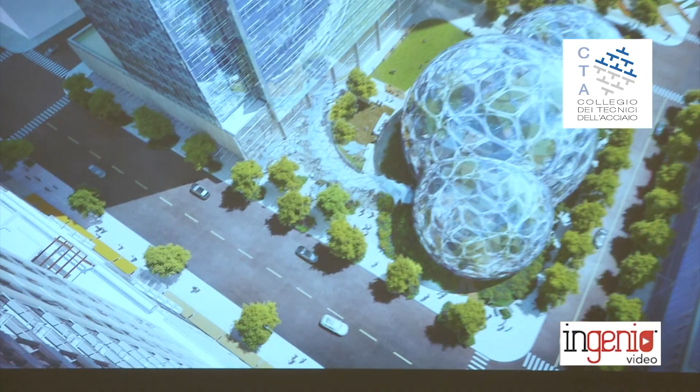So the first project I'll share is the Spheres, which is for Amazon at their headquarters in Seattle. This project came as the challenge of the chairman of Amazon, Jeff Bezos. He approached the design team and said, I want to create a place where my employees can go and have a nice break, experience nature, and experience a lot of oxygen intake, because if you're around plants, your brain works better due to the oxygen. He wanted us to create this place, and challenged us, saying, if you think about the historical conservatory, in the sense of a traditional British conservatory where plants are grown inside, I want to reimagine that with some kind of new place and new structure.

Don't repeat what has been done before. So, of course, we looked and studied all these historical references as inspiration for what we might do different and better.

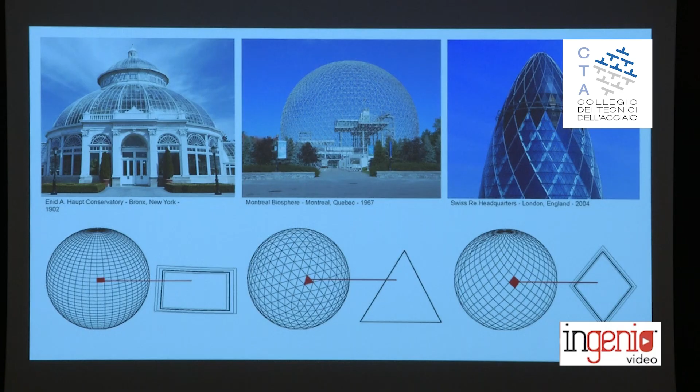The idea came to us trying to apply very simple principles of geometry. How do we create these spherical structures in something that can be easily rationalized through mathematics? The ultimate answer for us was a geometric form called a pentagonal hexecontahedron. It's a very big word, but essentially it's a soccer ball with 60 sides, all sides being equal, and each panel being a pentagon. If you make that pentagon 60 equal, identical times, you can make the spherical surface.

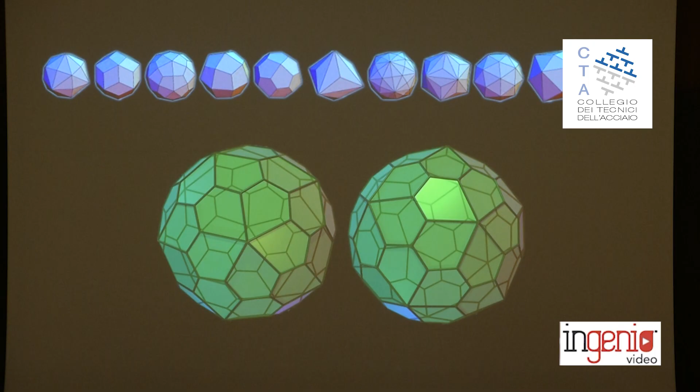This was the basic idea, and the punchline to this entire project is if you have a guiding principle, a big idea that you can formulate your design around, you can create very complicated, seemingly complicated structures, but actually made very simply.

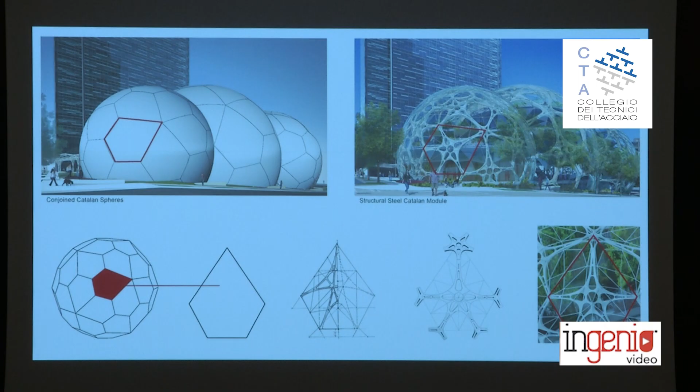So in the case of applying this pentagonal shape to this sphere, you can see here the beginnings of the idea of how we might create this pentagon 60 times to create the sphere. But the pentagon, in terms of its scale, was quite large, and in order to stabilize it, we needed to create some kind of bracing structure inside it to keep it stable. We studied many variants of what that bracing structure might be inside the pentagon to keep its stability.

Ultimately, we resolved to this combination of engineering, art, architecture, and fabrication. This was the output of a great collaboration between the architects, engineers, and fabricators, looking for a solution that was quite beautiful in the architect's eyes, could be rationalized by the engineers, and then the fabricators could bend and weld to create this piece easily. This was the key to the entire project. If you make this piece over and over again, you have the structure.

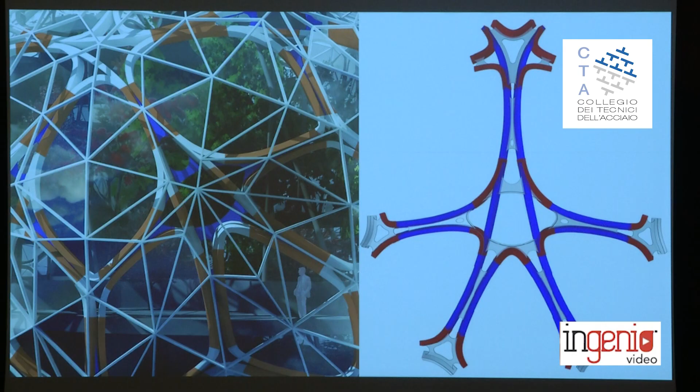At the end of the day, when we made this building, the entire set of structural drawings were only 12. Only 12 drawings to make this building. That's how simple it was.

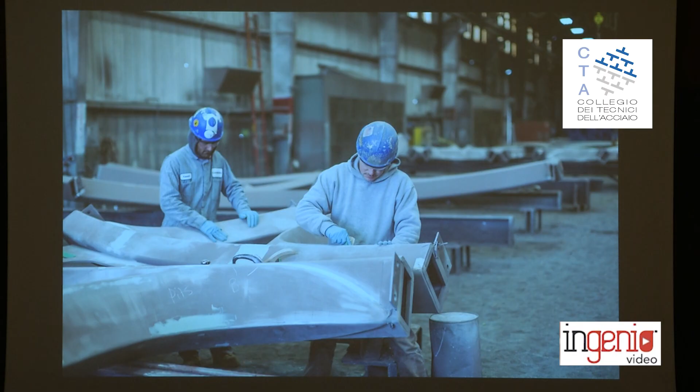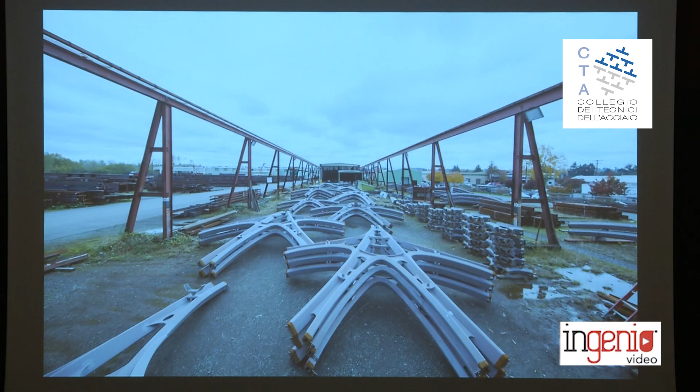So the fabrication ensued. All of the pieces were made very carefully in the shop, pre-assembled and stockpiled. You can see here that they're stockpiled in identical pieces so that it can easily be shipped to the site and assembled. As they arrived to the site, they were lifted in place. You get a little sense of the scale.

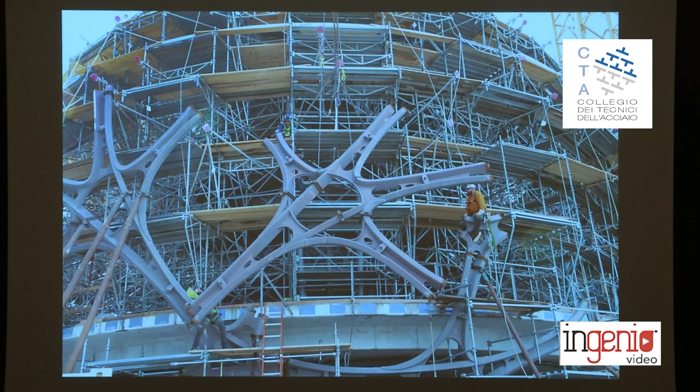They're quite large. And as they were put together, the assembly in the field, the actual connections and attachments went together very smoothly because of all of the tight tolerances that were available to us via the shop construction and the prefabrication. The ironworkers had virtually no troubles with fit-up or any erection issues during construction.

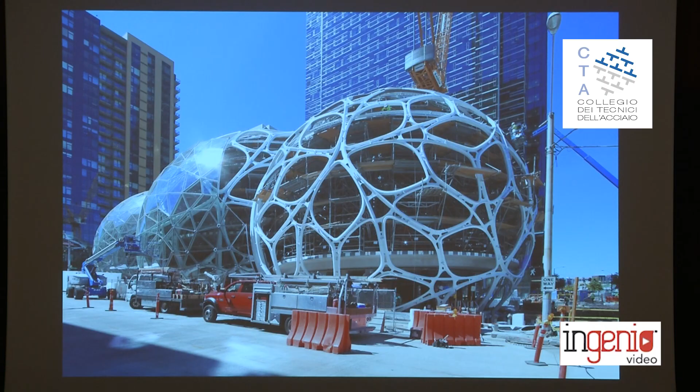And then when the project was completed, it turns out to be quite beautiful. In fact, I mentioned there's 12 drawings for the entire structure, these 3 spheres that are conjoined. There's 1 drawing for each sphere and 9 drawings for where the spheres conjoin. That's where the complexity was.

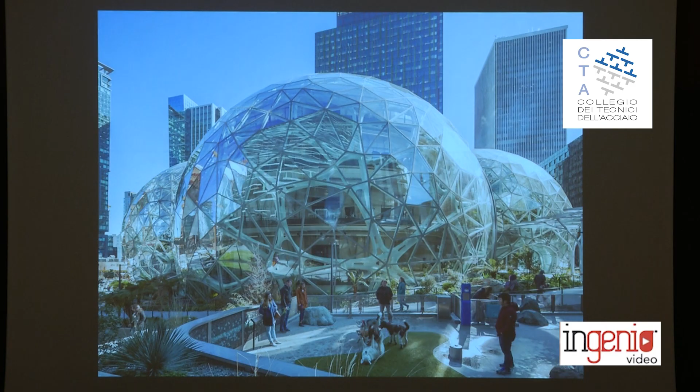But the principle to this whole story is that you can make these very beautiful structures very simply if you use steel and if you have a big idea that can drive your design thinking.

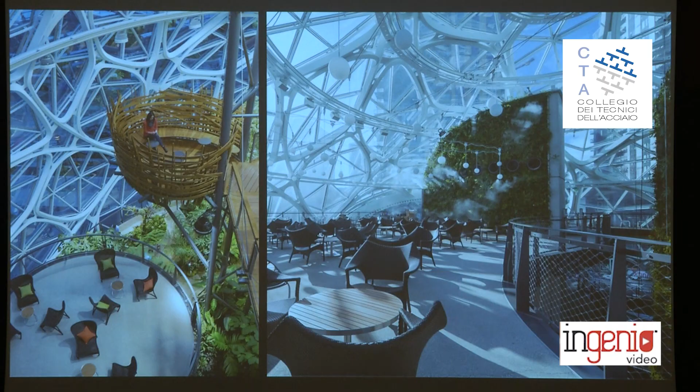These were completed about 2 or 3 years ago, so if you are able to visit Seattle at some point, please come by to visit. I'll give you a personal tour.

It's quite fantastic. Inside, there are 40,000 plants, and these plants were all selected very carefully so that the humidity and temperature control are such that it's a very comfortable place for people to be. As opposed to many conservatories, you go in, it's very humid, very warm, very uncomfortable.

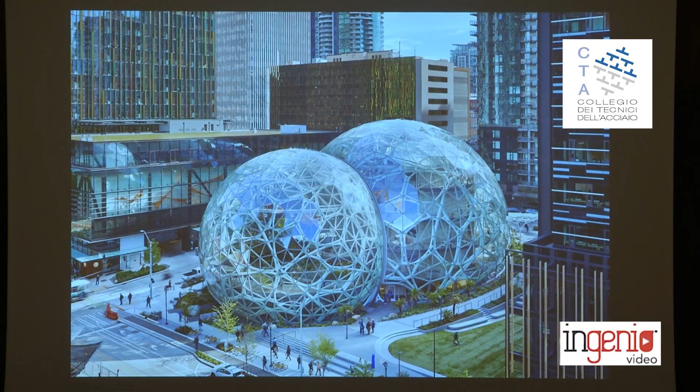In this particular case, because the charge from Jeff Bezos was to have a place for his employees to go, it was very carefully selected by a botanist to select plants that could survive well in an environment that had a low humidity and a comfortable ambient temperature for people.

All right, that's the first project. The second project I want to share with you is a tall building, and the conclusion of this story is through a unique steel construction, we were able to reduce the construction period by a third.

Not 1 month, a third. The construction period for this building was originally thought to be 32 months. We actually completed the building in 22 months. And it was all driven by the structural system I'm going to share with you.

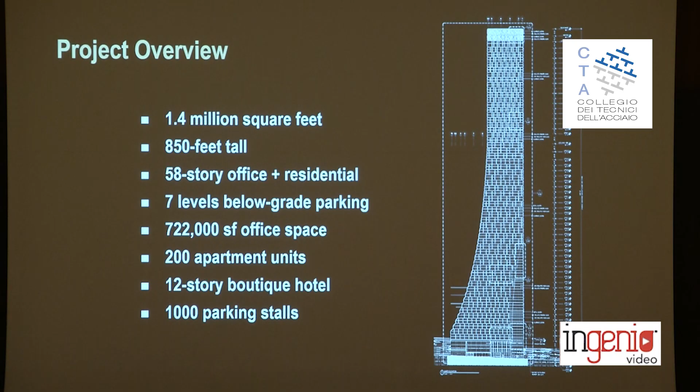So here's the building. It's about 260 meters tall, so fairly tall, mixed use, and a very slender building. The floor plans for the building are fairly typical of what you might see anywhere in the world.

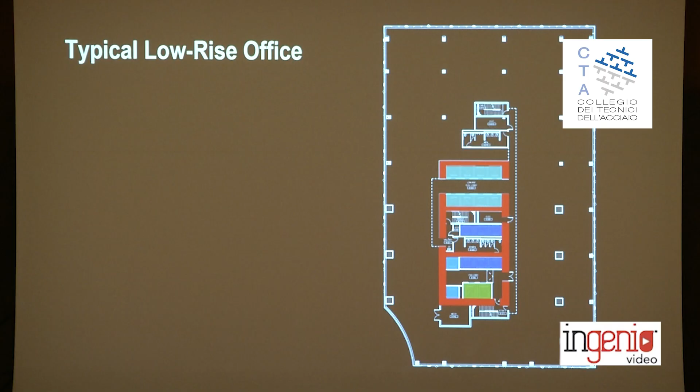Here in the red color is the core, which ultimately is the structural bracing and structural core of the building. But this is a typical low-rise floor. As the building goes up, it tapers, and the core also reduces in size.

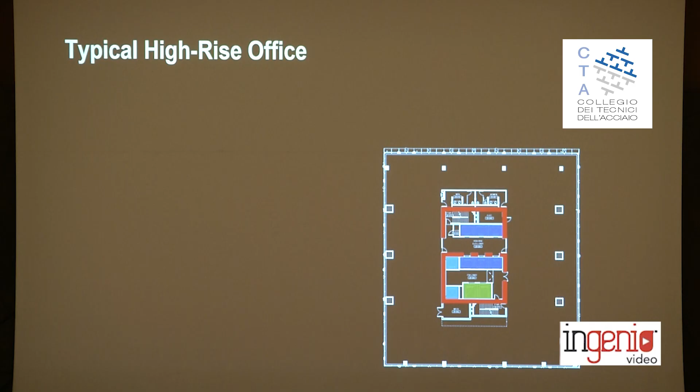And at the top of the building are residential apartments, and the floor plate has gotten much smaller, and the core once again is much smaller.

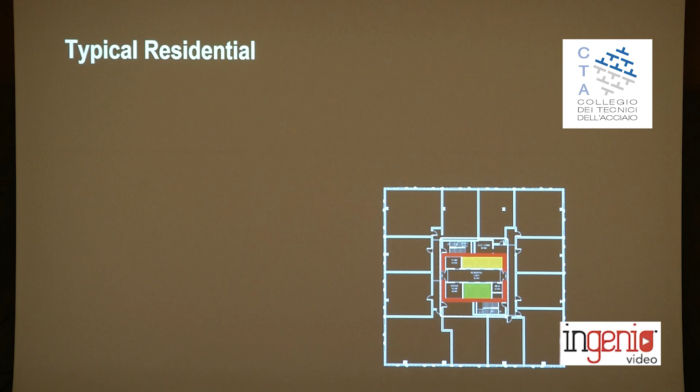It turns out in this building, because of its height and slenderness, that the core alone was not enough to brace the building for the high winds and high seismic load. And so we also included the idea of outrigger and belt trusses. Nothing unusual about this structural system.

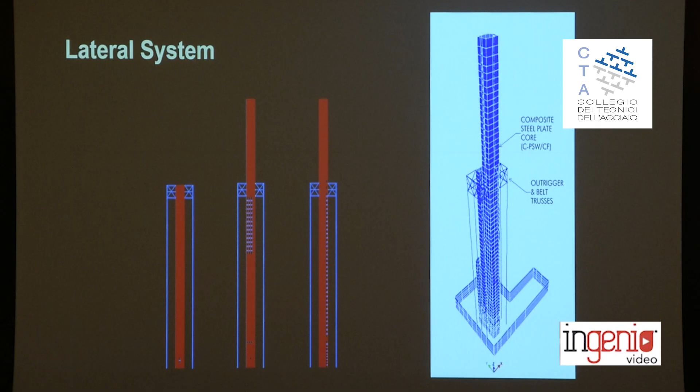This is a system that's been used regularly on buildings around the world. Nothing unusual about it.

Also, in the beginning of the project, the idea was to build the building using a technique that's very common, which is a reinforced concrete core surrounded by structural steel floor framing. This is really a tried and true construction approach.

On most projects that I'm involved in, it's common that the core might advance 1 floor per week, whereas the steel floor framing might advance 2 or even 3 floors per week, much faster. So there's this lag between the concrete construction and the steel, so as they go up the building, the steel ultimately catches the concrete.

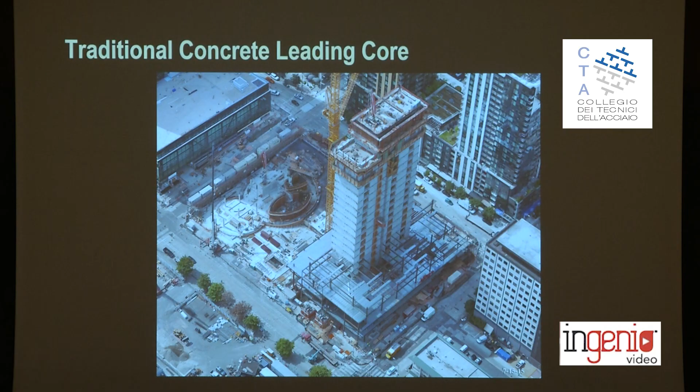Our challenge, or our thinking, was how do we solve that problem, or how do we go faster and not have that time lag? And the solution that we came up with was something that we ultimately call SpeedCore.

Maybe you've heard of this, but what it is, is a prefabricated modular panel system wherein steel panels are prefabricated in the shop, trucked to the site, erected like Lego blocks, and then concrete is infilled later.

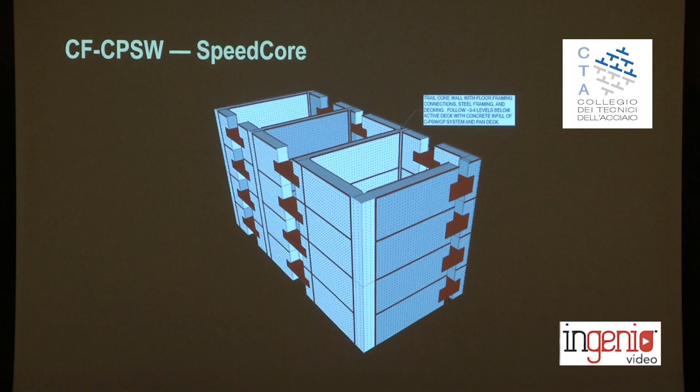There's no reinforcing steel, no formwork, no embedded plates. It's a very simple system.

A simple panel for this system looks something like this. It's 1 story tall. So in the case of our building, it was about 3.5 to 4 meters tall and about 9 to 10 meters long. This is something that could be fabricated in the shop and then trucked to site.

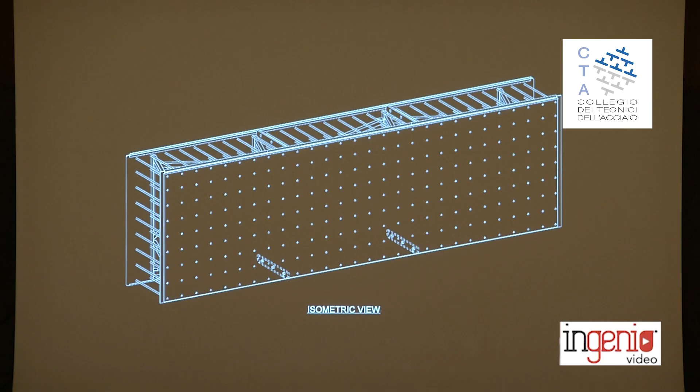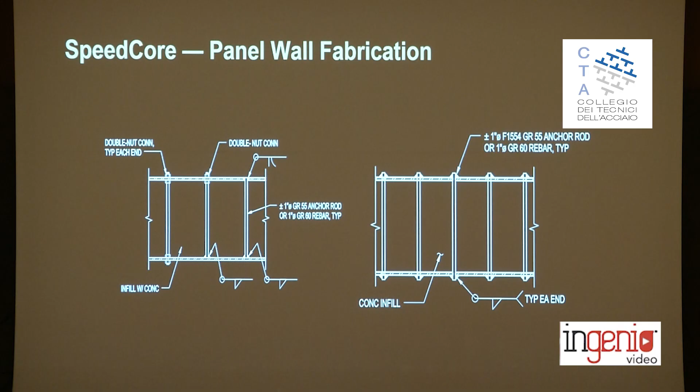If you look down in plan view, it's comprised of 2 steel plates. Each plate is about 12 millimeters thick, so very thin plate, interconnected by a series of rods or bars to connect the 2 plates together. There's a variety of ways to affix those rods to the steel plates, and what was ultimately chosen on our project is the detail on the right, where the rods were passed through the plates and then fillet welded on the outside.

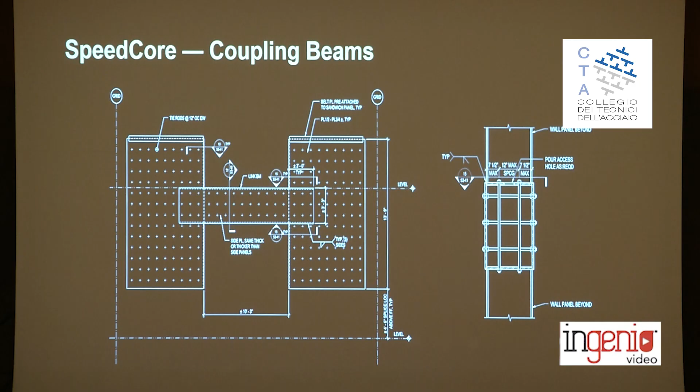A second panel type was used compared to the planar panel type, wherein we had doorways that needed to go through the core for elevator lobbies, toilet rooms, mechanical rooms, or what have you. In this case, we wanted to prefabricate all of the coupling beams in the shop as part of the panel system, to take all of the coupling beam assembly out of the field and put it in the shop.

The field connection from panel to panel, as these panels were stacked in the field, in this case, was a welded connection. We have tested both welded and bolted connections. It need not be welded, it could be bolted. In the case of this project, the erector chose to weld because he felt he had greater control over the field tolerance with welding than if it were bolted, and matching up literally thousands of bolt holes frightened him. So instead he chose to weld.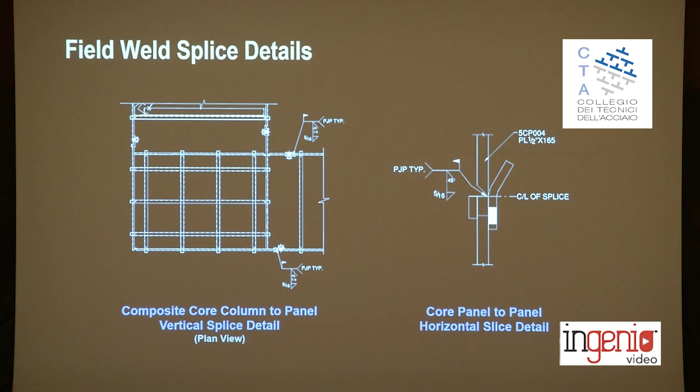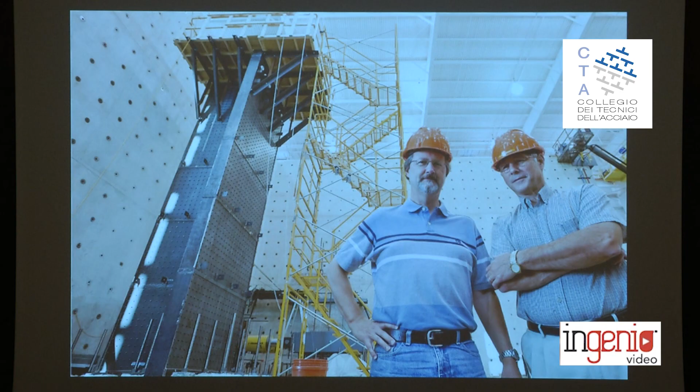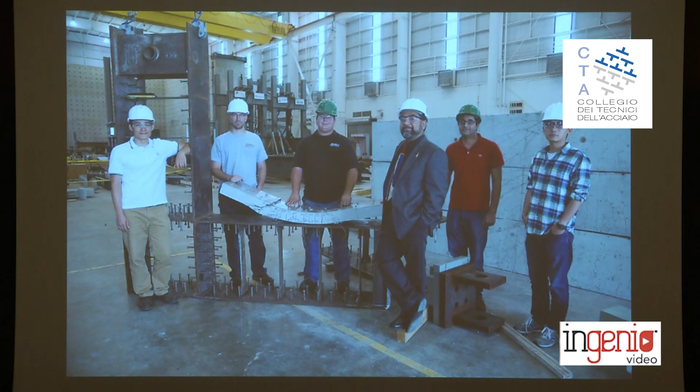This system was the product of 10 years of prior research. We'd been in the laboratory at Purdue University and at the University at Buffalo testing very large-scale assemblies of this to prove out its ability to withstand temporary loads during construction, its ability to withstand wind and seismic loads. These are our research teams. So we were in the laboratory testing and proving the system worked for 10 years before we found a client who was courageous enough to let us do something nobody had ever done before, and that was to employ the system on their building.

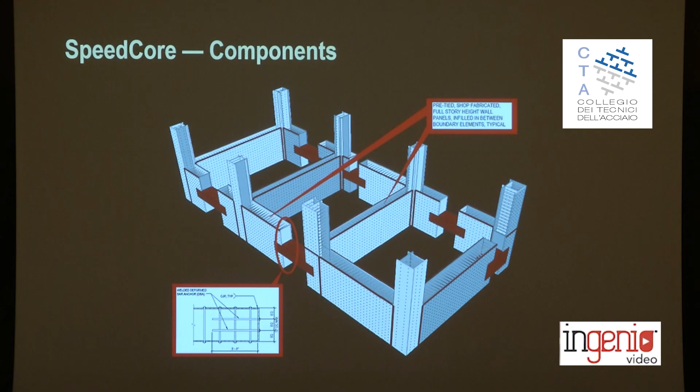A few more bits about how the wall goes together. In this case, what we chose to do was pre-assemble the corners, 8 corner columns, as prefabricated boxes. Those boxes were each 2 stories tall. Those were erected first, and then the panels were swung in between those columns. The erector chose this approach so that they could easily erect those 8 columns, get them properly plumbed and true in their locations, and then use them as a guide for these very large wall panels.

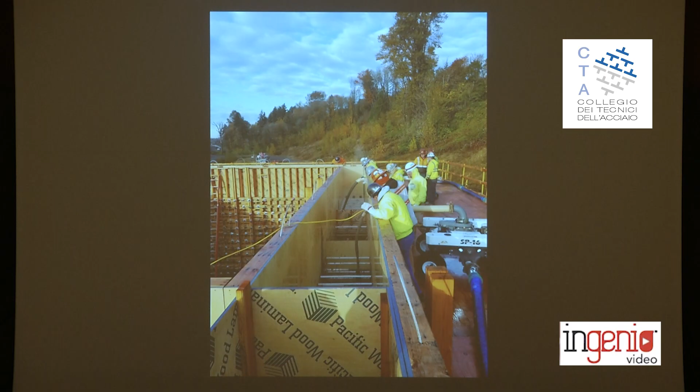In addition to the laboratory research, we made very large-scale, full-scale mock-ups, in this case to test the concreting operation, because the concreting is actually done later in the field, and we wanted to be sure that the concrete flowed through these walls appropriately, that the material performed properly. We tested everything from concrete strength to modulus to heat of hydration to shrinkage, in order to prove to ourselves that the mix design we were planning to use was going to behave properly.

In this case, we made wooden formwork and stripped it away so that we could ensure that the concrete had proper consolidation inside of the core wall after we placed it.

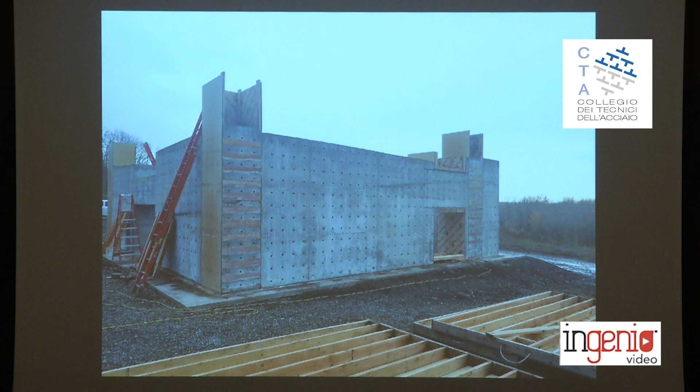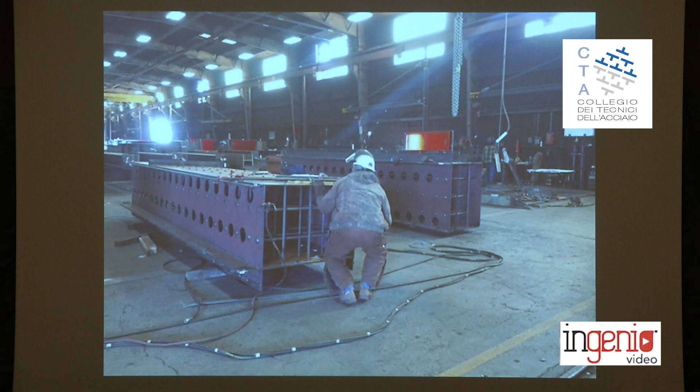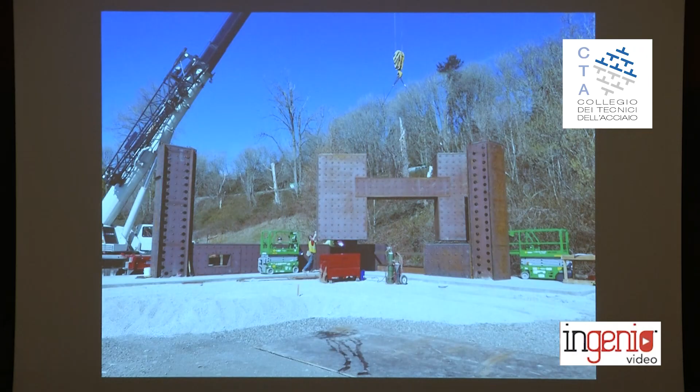We also made a full-scale steel mock-up wherein we prefabricated the pieces in the shop. Here you see one of those corner columns. The circular holes you see are to allow the concrete to flow around the corner through the column as the concrete's being placed. This is the steel mock-up, allowing the erection crew time to practice how do we take these very large, very heavy pieces, bring them on the truck, tip them off the truck, hoist them with the crane, and put them in place. So the steel erection crew learned a lot by practicing on this mock-up.

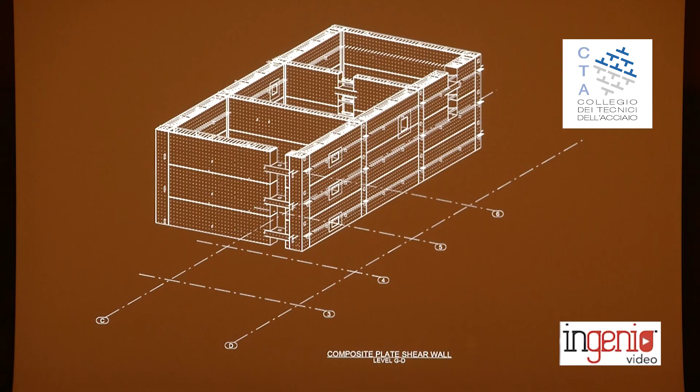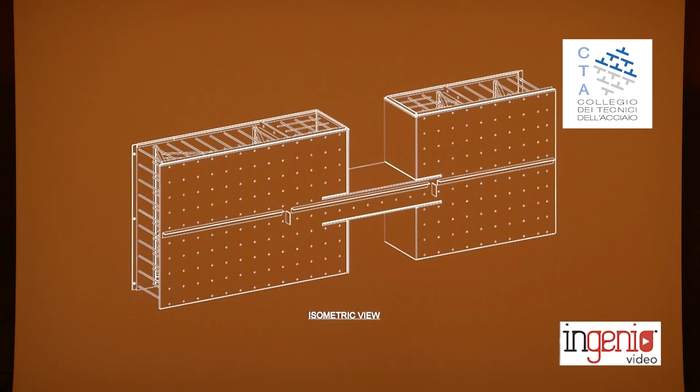Also the welding in the field. And then finally, of course, we did the proper shop drawings to ensure that all of the parts and pieces were properly detailed. Here you see, in addition to the panel with the door opening through it, the ledger angle for the deck that will be supported by the core wall, and the shear tabs for the beams that will be supported by the core wall. These were all prefabricated, so as they came to site, there was nothing to add. The wall panel went up and the beam was connected. It was very, very fast because of this.

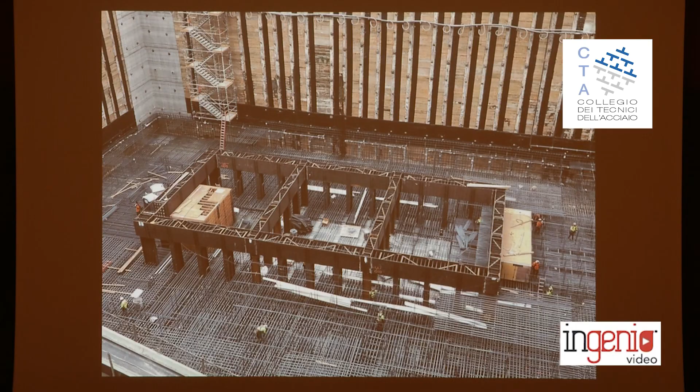In addition, all the mechanical penetrations were pre-planned, prefabricated as part of the panels. The panels were made and stockpiled in the yard, put on the truck, and then shipped to the site where they were hoisted by the crane and then erected down into, in this case, the foundation, which was a mat foundation. The bottom of the core was supported on stanchions embedded in the mat foundation, which was a 3.5 meter thick mat.

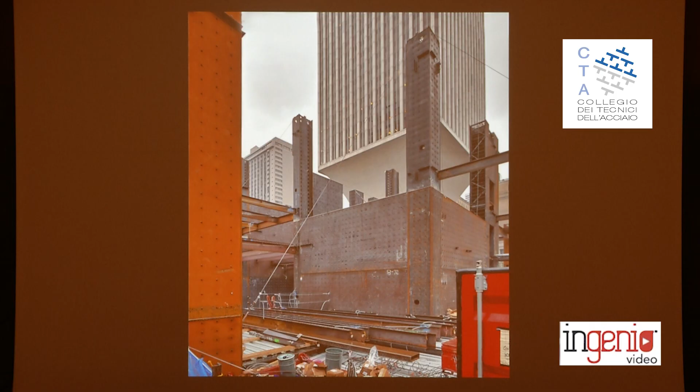Here you see that construction sequence: the 2-story tall columns, the single-story wall panel being inserted. And if you look in the column, you'll see a circular hole, and that circular hole is the placing port where the concrete pump was placed in order to pump the concrete into the wall later. Here you see the erection.

Interestingly, this building was built immediately adjacent to my personal office. So each day I came to my office and looked out the window. This is the view from my window. I took this picture personally from my office, so it was this close to me each day as I watched this building build.